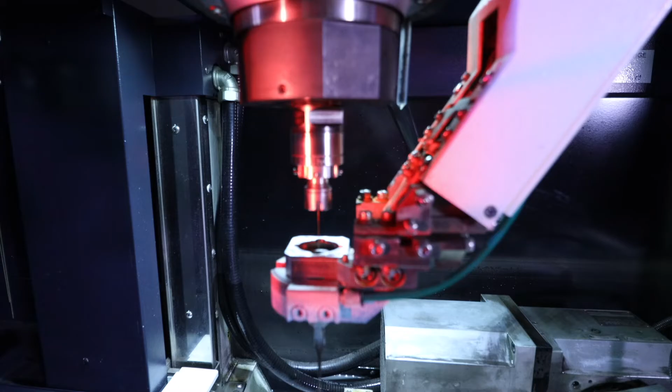Hi, my name is Brittany Yeshua. I'm the president of Burke Aerospace. Burke Aerospace is a manufacturer of both aerospace and industrial gas turbine components.

I think about it from the military side, but also the commercial side. I fly on those planes. My family flies on those planes, and I want to know that every single part is 100% conforming and safe, and to know that we can bring our soldiers home safely.

The benefits of model-based definition: you're taking lead times that would primarily take 3 to 6 months on an NPI cycle down to 1 to 3. This morning I walked in and our engineering team, who are wonderful, knew that I was going to be talking about model-based definition. And he said, look at this, we just had a model come in. He's like, I'm already starting the program now.

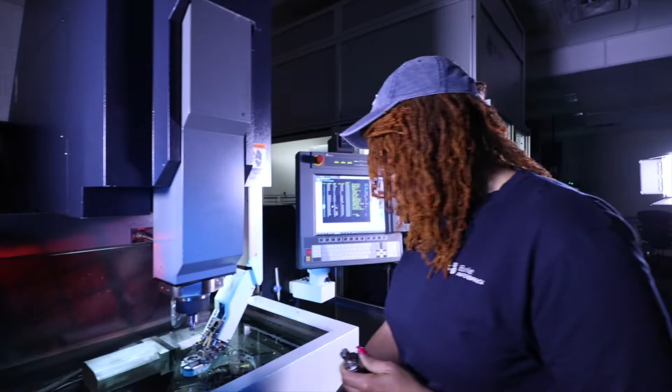So I saw firsthand this morning how quickly we go from concept to production; it just got cut by 2 months just with that one model being presented in that format. You need to make sure you have invested in the equipment to be able to absorb those files. There's things out there that will allow you to add on to your machine's existing equipment, but you have to make the investment to make sure that that data can be transferred easily between the two.

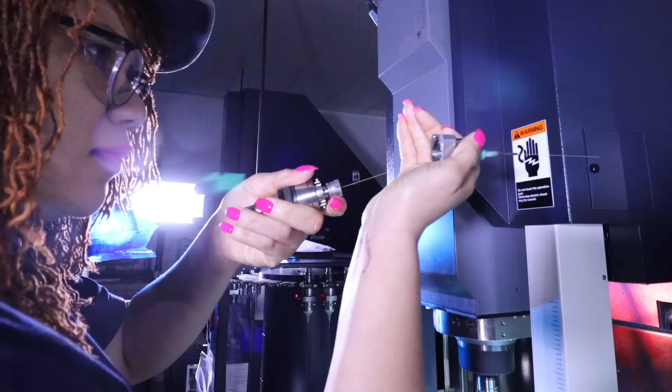We did a business case and we looked at it. We made our money back within the first 30 days. And that's amazing for a payback. We already invested in both the monitoring and sensoring on the machines, but we also invested on the inspection side of it as well, because it's full circle. You need it all reading to one another.

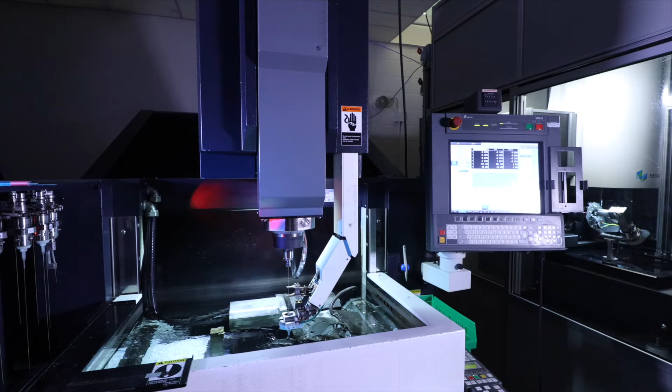And so it really takes the human out of the rework. A lot of times you'll see the non-conformances happen when you try to rework a part. And this takes the whole reworking loop out of the picture. The information would be shared between the inspection report and the machine so that they can go on and make offsets without having to pull a human into the process, taking the part out of the machine to inspect it on something else. Take a lot of that guesswork out. At the end of the day, make a more conforming part with less defects.

As you heard from Brittany at Burke Aerospace, their company is taking full advantage of model-based definition. They're able to get their parts out to market much faster with less cost, but more importantly, increased quality. I'm Jackie Garofano, Chief Technology Officer at CCAT, the Connecticut Center for Advanced Technology.

We've brought to you a series of videos all about model-based definition. In our first video, we showed you how to create that MBD file. And in our third, it's all about inspection using MBD. Now, we're going to take you through the process of creating CNC toolpaths to machine using this DMG Mori.

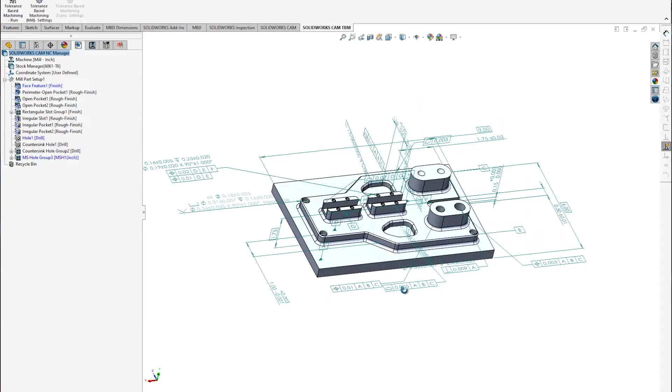Thank you, Jackie. So at this point, I'd like to go ahead and open up my model-based definition file and set up my machining environment, and the best person for me to talk to in order to accomplish that is my colleague, Henry, who's an applications engineer. Hi, Henry. So I have the part open here on the screen, and I've got 3 basic dimensions on the part, which give me an idea about the size.

Looks like the height is 1.75 inches, the width is 6 inches, and the length is 9 inches. And the material that's specified for this part is aluminum 6061-T6. Do you have any recommendations on the stock material size, the kind of machine that we should put this on? So for the blank material, I would go with material that's slightly larger than the final part. So I have this part here that's about 6.5 by 9.5 by 2 inches.

Okay. As far as the tooling goes, it looks to me like there's nothing too special needed for tools on this part. Okay. As far as the type of machine, a 3-axis machine would be fine, but we have a 5-axis machine ready to go, so we'll put it right on there. Okay, great. Well, with that information, I'll go ahead and set up my environment within SolidWorks CAM.

Thank you. Cool. Thank you.

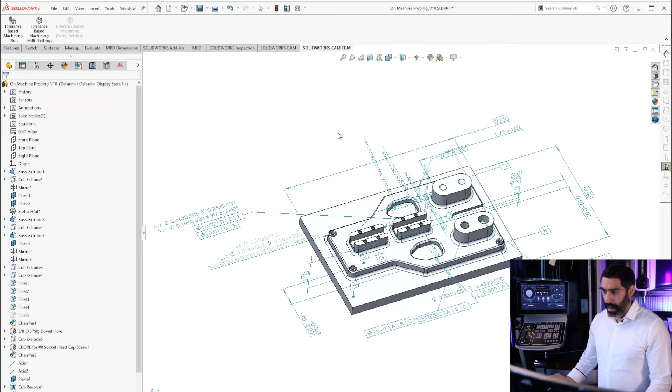Now that we have the information about the tooling that we're going to use, some idea about the stock material, and about the machine that we're going to put it on, we can go ahead into SolidWorks, and we can put all that information and set up our environment for the machining. I've got my file open here, and this is the model-based definition file that we had created. All of the definition is on each of the features here, and we're going to use that to our advantage.

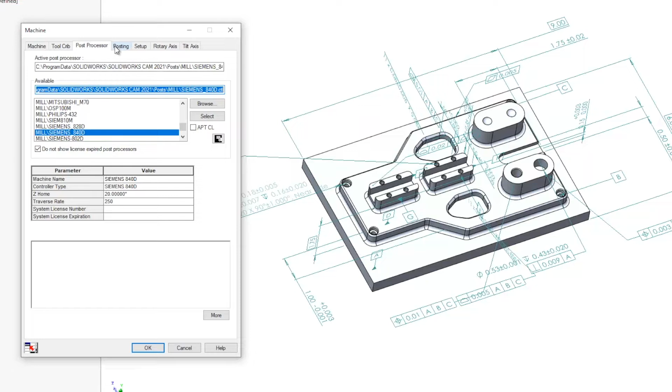What we're going to do is, the first thing is go into SolidWorks CAM, and we want to go into defining our machine. And in this case, this part, as Henry pointed out, is 3-axis machining. The post processor, the particular machine that we're going to be using is a DMG, and that uses a Sinumerik 840D control. So we're going to be selecting a Siemens 840D control from the options here under active post processor.

We don't need to set up a rotary axis. We don't need to set up the tilt axis. We're going to strictly maintain 3-axis machining on this part. So with that set up, we're going to go ahead and click OK. And then we can get into our tools dialog. If we hover our mouse over the top tabs, you can see that one of the tabs is SolidWorks CAM Tools tree. If I select that, I have a number of the tools already defined.

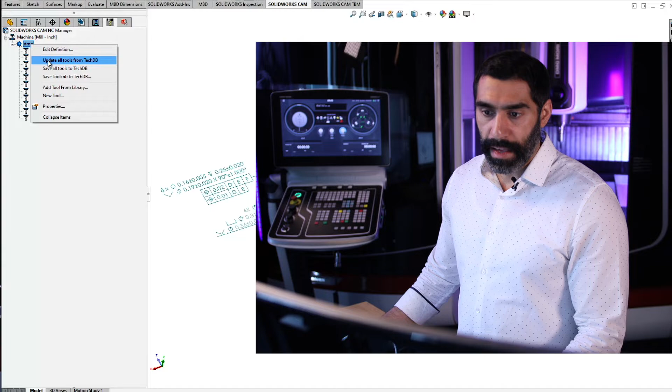And if I wanted to add more tools to it, for example, let's add in a 1/4-inch flat end mill. We'll go ahead and right-click on the DMG machine, and we'll add a new tool from library. And what we could do here is we could select a flat end mill, and we can scroll down to where we find a 1/4-inch, and we're going to choose a 2-flute and hit OK. So you can see there that that's added my 1/4-inch flat end mill to my tool set.

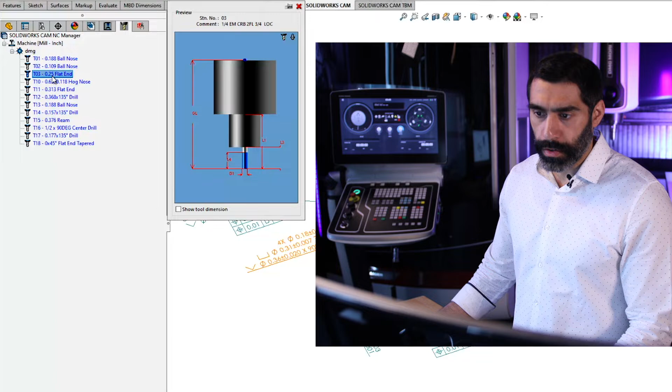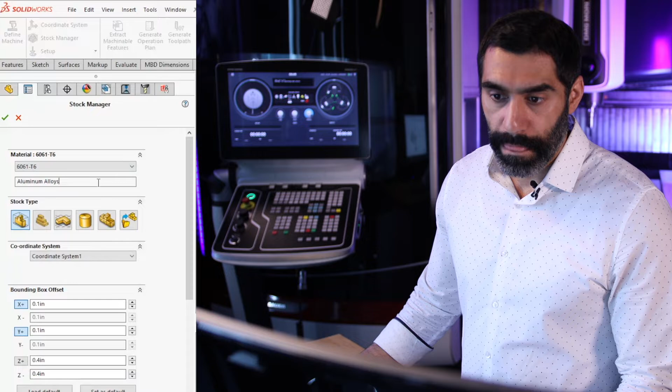At this point, we can go ahead into our SolidWorks CAM feature tree. And at this point, we can set up our stock manager. We go to Edit Definition. We know that this material that we're going to be cutting out of is aluminum 6061 T6, so we can define that here. I already have it defined, but we can go ahead and just drop down the dialog, and you can select 6061 T6. That's an aluminum alloy, and our stock type, we're just going to choose a regular bounding box.

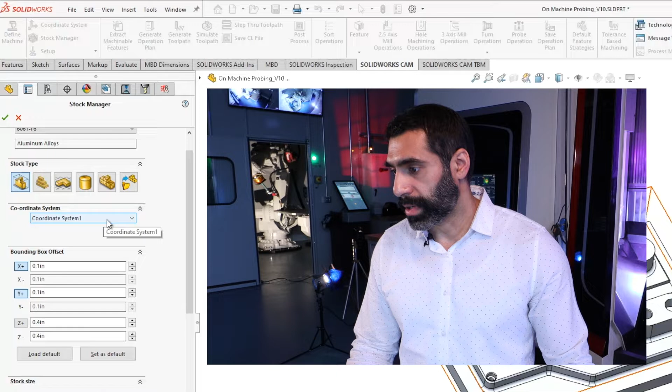So you can see here the different kinds. Our part is pretty rectangular in shape, so the bounding box method is going to be fine for generating the stock material. We can choose our coordinate system here if we had one defined, and then we can define our bounding box offset. So we can add a little bit of material on each side, and you can see what I have defined here. 100 thousandths on X and Y, and then on Z I have 400 thousandths added. You can go ahead and click the checkbox here.

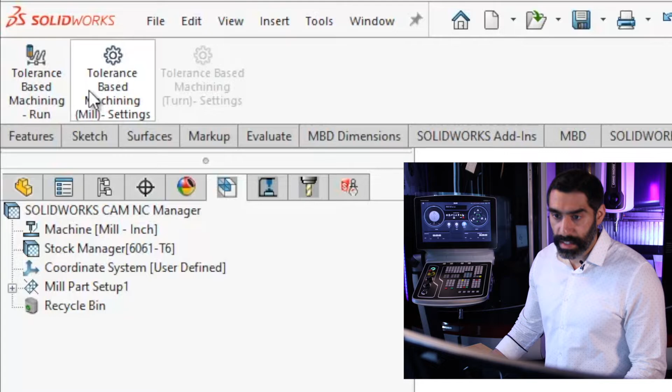The next thing we want to do at this point really is, because we have defined now our environment, we have defined all the tolerancing per feature, we want to go into SolidWorks tolerance-based machining dialog, and we can set up our strategies. So if you go into the SolidWorks CAM tolerance-based machining tab, you'll find two different options. There is a tolerance-based machining run and tolerance-based machining mill settings.

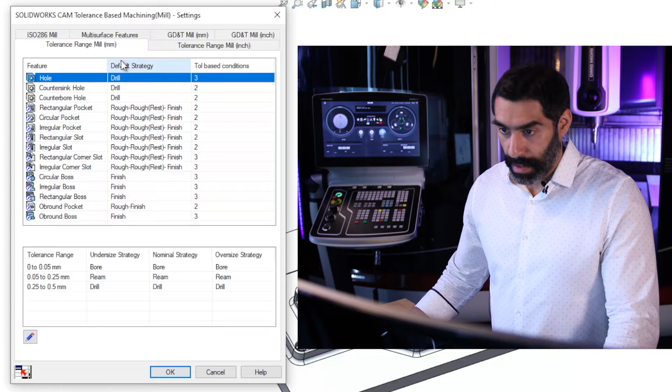So since we already have this defined as in the units to be in inches, we're going to go ahead into the settings dialog, and you can see that there's a number of items that we can really set up here. The first one that comes up is the tolerance range, and we're going to switch over to inches. You can see all the different features that SolidWorks CAM can recognize. What we can do here is, for each of the features that it recognizes, we can set up a number of different tolerance ranges, and for each of the tolerance ranges we can set up the machining strategy.

So for example, for hole, if we click on it, you can see down here that it already has 3 tolerance-based conditions defined. If we click on the Edit button, we can change the ranges.

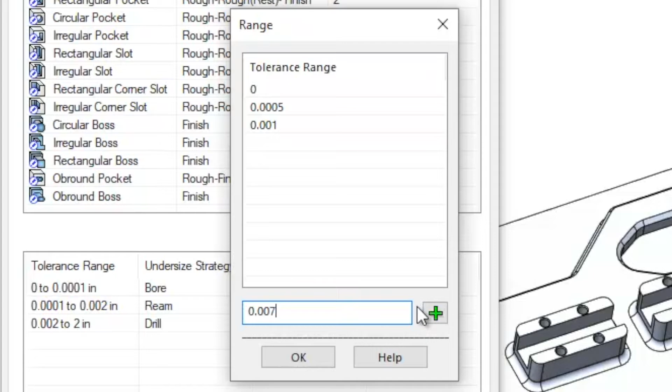So in our case, we're going to go ahead and just delete, type in 5/10 thousandths, and we can click on add, and then we can add in another range of 5/10 thousandths to 1 thousandth. So we can type in 1 thousandth, and then from 1 thousandth to 7 thousandths, and we can add that in. Click OK, and now you see that my tolerance ranges have changed.

And what I can do at this point is modify the strategy. So we have 3 different strategies per tolerance range. One of the biggest time consumers in coming up with machining paths is when you're dealing with asymmetric tolerances. Using tolerance-based machining, you can save a ton of time because the system automatically detects asymmetric tolerances and automatically applies machining offsets so that you're machining to the mean.

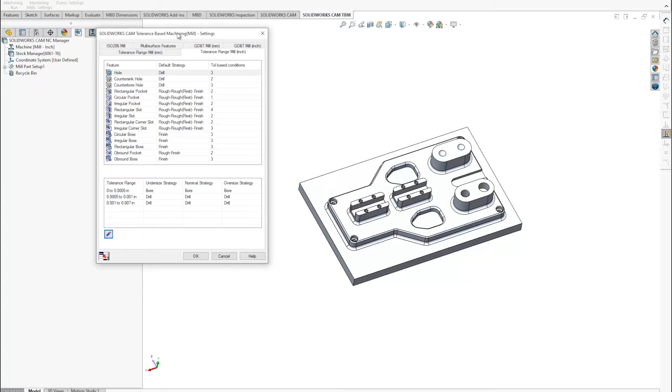In this case, we're going to use tolerance-based machining inside of SOLIDWORKS CAM that automatically calculates all the machining paths to the mean of tolerance. And what we're doing now is setting up the undersized, the nominal strategy, and then the oversized strategy. So within SOLIDWORKS CAM's tolerance-based machining dialog, for each of the features that we see, you can see that we have those three strategies.

So undersized, if you have a minus 5 thousandths plus 0, you would be on the undersized strategy. If you had a plus 5 minus 0, you'd be on the oversized strategy. Whereas if you had a plus and minus 5 thousandths, you'd be on the nominal strategy. And so what we can do now is set up our machining strategies here.

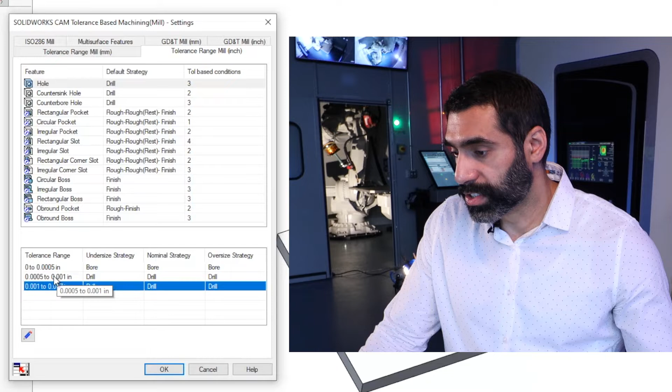So for a loose tolerance, we're okay with just doing a drilling operation. So we're going to select drill for all three, for undersized, nominal, and oversized. If we have a slightly tighter tolerance, we'll go in with a reaming operation. And then if we have an even tighter tolerance, we'll define that as a single point boring operation for all three of the strategies.

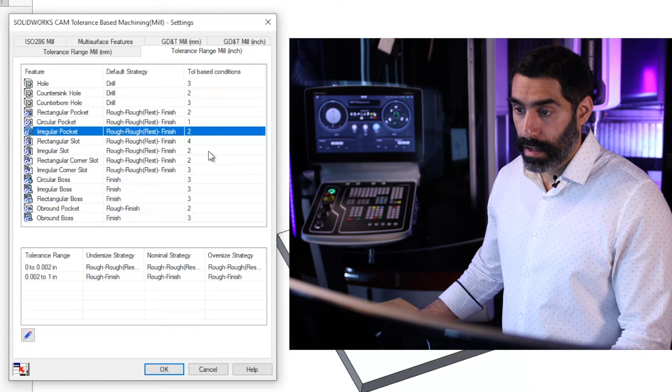In the same way, we can set up our strategies for countersink hole, for rectangular pockets, for irregular pockets, and all the other features that you see defined here in the list. The other strategies that we can set up are our GD&T. If we click on the tab in the dialog here, you can see that for each one of those features, we can also set up our strategy for the different GD&T callouts.

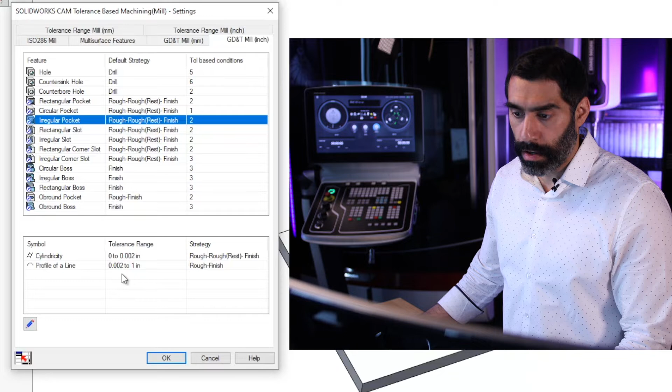So for example, if we have an irregular pocket and it has a cylindricity callout or a profile of a line callout, we can set up our different tolerance ranges per symbol, and then we can set up our strategy for each one of those symbols. So with that all set, the next thing we're going to do is click OK. We've essentially set up our tolerance-based machining strategies using the dialog, and you saw how simple that was.

You just give it the information that you typically would take looking at a 2D drawing and deciding on the best tool, the best machining path, the best strategy to use to produce that part. It's a one-time effort, which you can periodically update if you find that other strategies work better over time. But essentially, once you have this set up, every time you receive a model-based definition file to create a machining path from, the system reuses all of that information that you've recorded.

So in essence, it knows and has the logic of what decisions to make to apply the correct tooling, the correct machining paths, the correct strategies to produce that feature. You're saving a ton of time here. If you had one feature, you may see that doing it manually versus using tolerance-based machining, maybe the time savings isn't that much. But when you have 200-300 different features, you're saving a lot of time. So the more complex the part is, the more beneficial this system is for you.

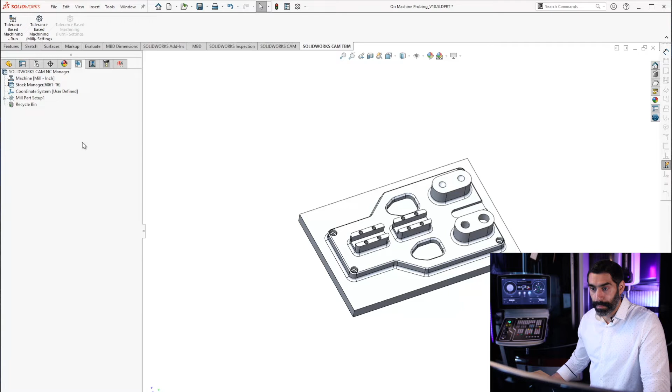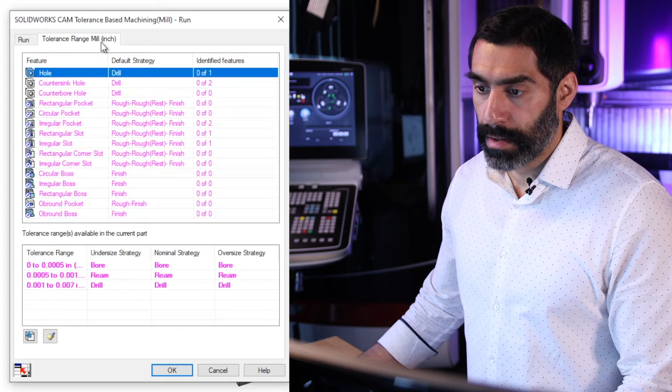In order to execute, we're going to go over to our tolerance-based machining run button. What we want to do is specify under the options that we want to recognize tolerance ranges. So I've got that checked on. Since that's checked on, you can see here that if I switch over to my tolerance range, all of my strategies are listed here. And you can see that the number of identified features is 0. So nothing is recognized yet.

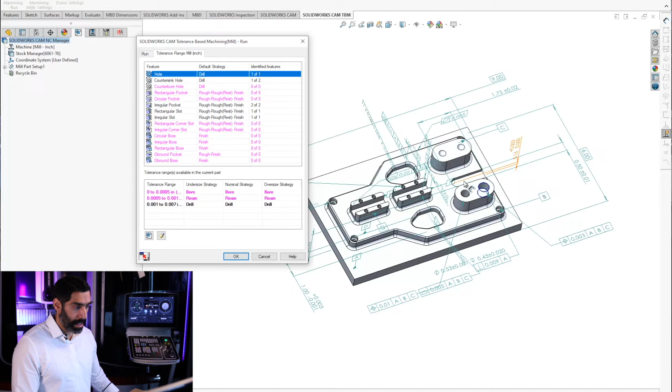What I have to do is go down and click on Extract Machinable Features. Now that that function is finished calculating, you can see that for the hole feature, we have 1 of 1 recognized. And you can see that that hole is highlighted here on the CAD model. For irregular pockets, you can see that we have 2 of 2 identified here, rectangular slots.

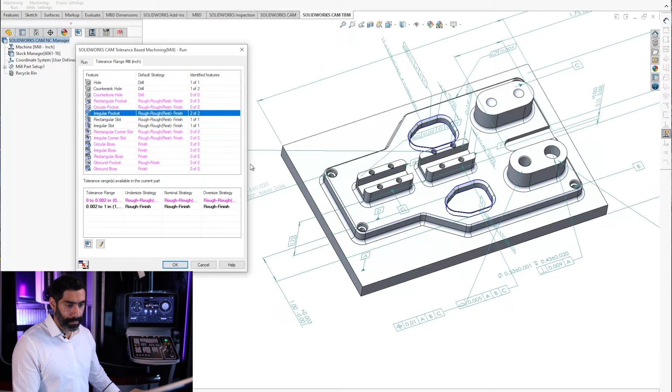Now, one of the things that I want to point out is the different strategies for each of these features. So if we click on, for example, irregular pocket, we can see down here in our tolerance ranges that we set up prior that we have 2 pockets identified, and both of which fall within the 2 thousandths to 1 inch tolerance range. And these are these 2 pockets here.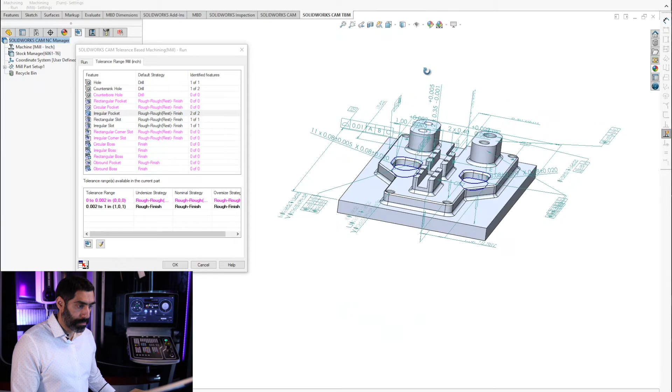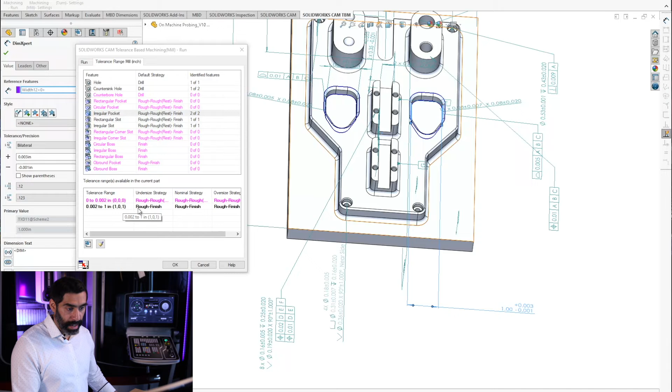And if we take a look at the tolerance ranges for each one, on this particular pocket, I have a width callout of 1 inch plus 3 thousandths minus 1 thousandths. So in this case, we're going to be using the oversize strategy to machine to the mean. And you can see that in the tolerance-based machining dialog, it's identified that one of the two features is on the oversize strategy.

If we look at the other pocket, we can see that this one is plus 2 thousandths minus 3 thousandths. So that would fall under the undersize strategy for machining to the mean. And you can see that in the dialog, it has identified the other feature to fall under the undersize strategy. So in this case, both are rough finish, and this is the true power of tolerance-based machining. It will automatically recognize the tolerance ranges attached to each of the features, and then it will come up with the appropriate strategy to make sure that you machine to the mean. So I'm going to go ahead and click OK.

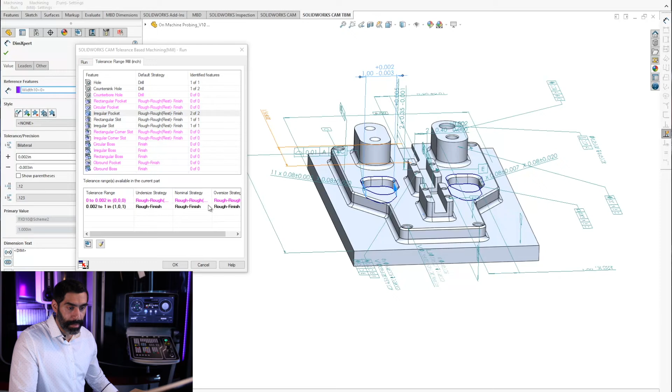And you can see that I have a mill part set up here. If I hover my mouse over it, you can see the preview of those operations. And what I can do now is right click, and I can generate an operation plan. And now that my operation plan is all set, I can go ahead and generate my toolpath.

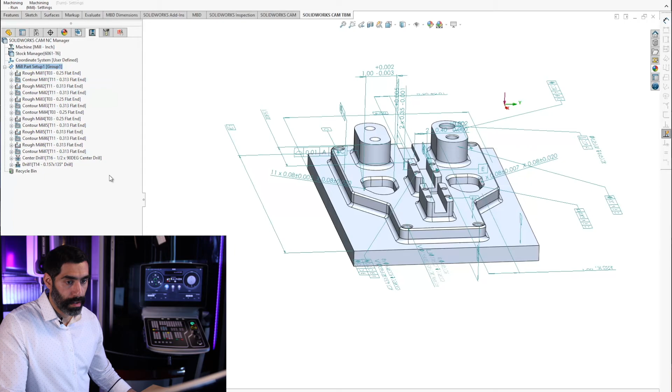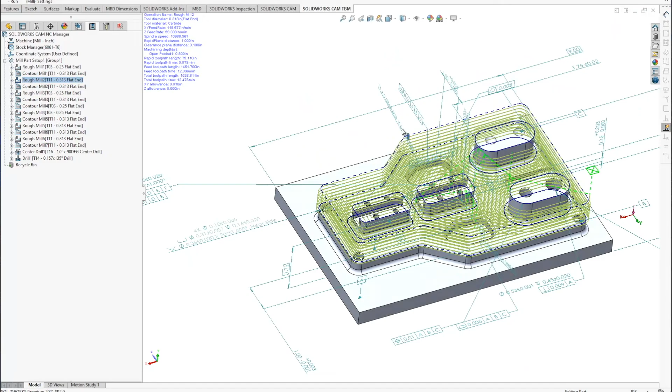So now if we step through this, you can see that SolidWorks CAM automatically came up with a rough milling path for my perimeter and the appropriate tool for that path. Then we have a contour to finish off that perimeter, a roughing path to eliminate a lot of the stock material from the top face, contouring around all the bosses on the top of that feature, rough milling to get rid of the material on the outside of the part, contouring again, and this pocket, we've got a cutting path defined on it,

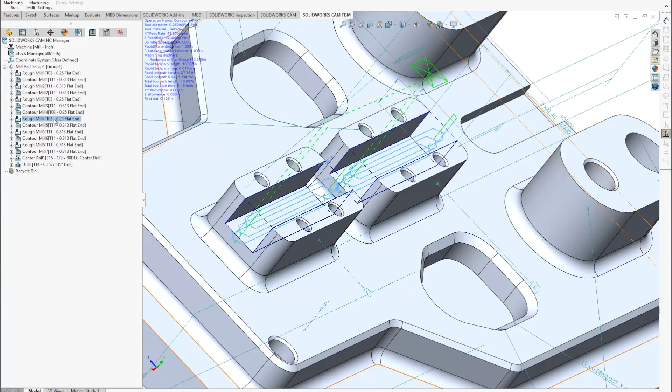a path to cut out this notch on the back, and you can see the two pockets as well. So we're going to go ahead and simulate this to make sure we don't get any gouges or crashes.

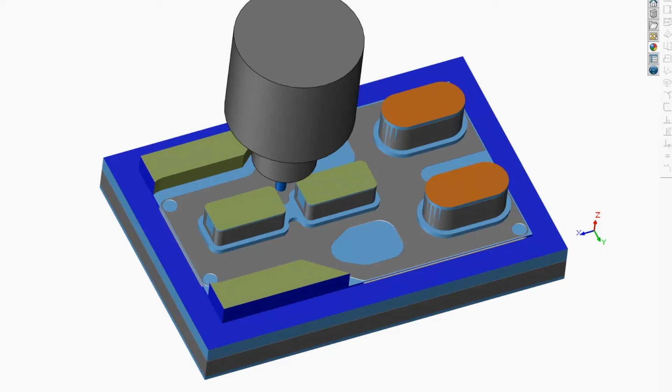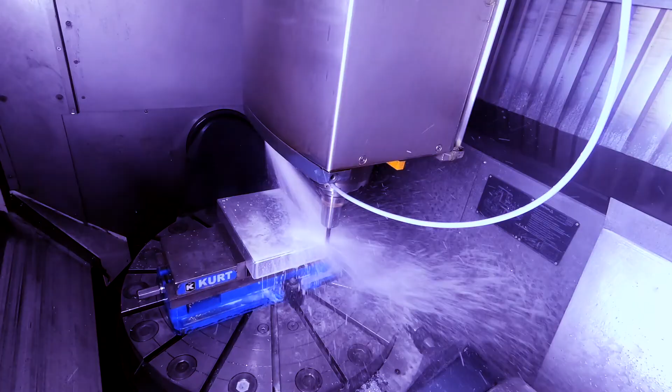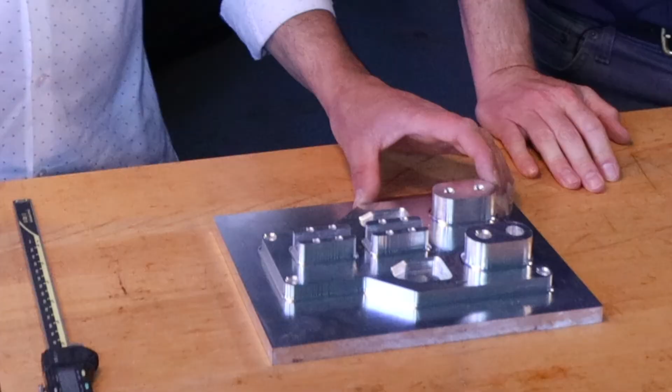So Henry, I see you've got the stock material in the machine. The only thing I would need from you would be the machine coordinate system, the origin offset. Okay. Henry, that looks great. Yeah, the surface came out nice and smooth. Kind of anxious to see what the measurements are on a couple of these features before we take it over to final inspection.

Nasir and the team have shown you how to create an MBD file, automatically ingest it into your machining operation, and now it's time for inspection. Leveraging MBD saves your company time, cost, and most importantly, puts your parts out to market faster. And that's what we're going to show you in this next video.